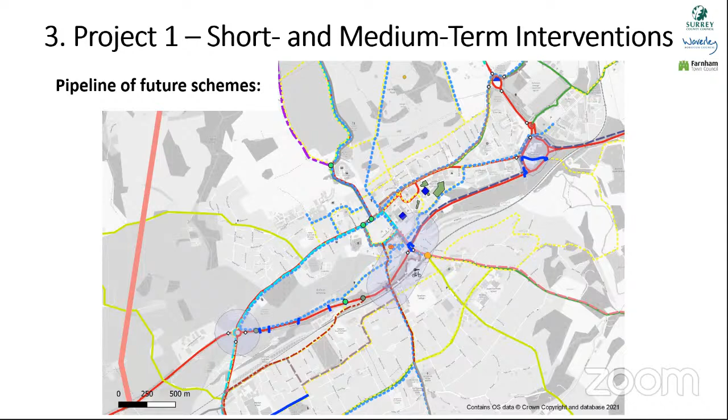Thanks, Peter. So the OIP included some initial routes for walking and cycling, but we're now embarking on the next stage, developing the LCWIP, which I'm not sure everybody knows what that is - a Local Cycling and Walking Infrastructure Plan. That will have a network of cycle routes, and we'll begin to look at the feasibility of those. So it's just basically continuing on from the OIP, looking at the walking and cycling network in more detail.

Okay, thank you. So when do you forecast that the LCWIP for Farnham will be complete? I haven't got that to hand, Peter, but I would suggest in a couple of months. But we can get a more firm answer than that afterwards - in a matter of months.

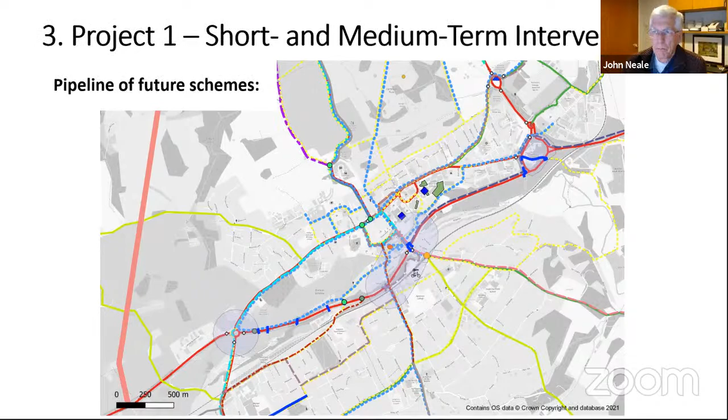That's right. Okay, do you want me to start? So project 2, the town centre project.

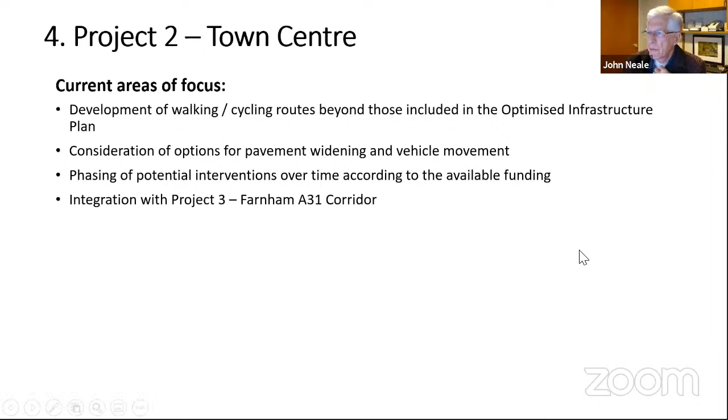Do you want to go to the next slide, or if anyone wants to ask a question at this point, I suggest we go on to that one. Sorry, John, if I can just mention that Pete Goodman still says he's waiting for an answer to a question about wayfinding and so on. There is, if this is the right time to pick that up.

Okay, let's do that. Peter Goodman, I'll read out your question. So if the wayfinding project does not include cycle signage, when will the 2 existing shared cycle paths receive some signage? Tim Oliver has confirmed in writing that this will be included in the short and medium-term interventions.

Elaine, could you just cover that? Yes, thank you. We have been notified of that, and they will hopefully be included in either the LCWIP work or on the medium-term interventions.

Okay, thank you. I know Peter is anxious to see all this put in place, as we all are. So we can only say to Peter, please be patient with us. We're moving as fast as we can. Thank you. Are there any more questions?

Jack Slim asked what happened to the notion of depots for HGVs to drop off goods to be carried to the shops. I think that's something coming up. You can take it as a question now or come back to it. Yes, I'm quite happy to answer it. I'm sure Chris will. This will be something we're looking at as part of the town centre project. Chris, do you want to talk in any more detail about that?

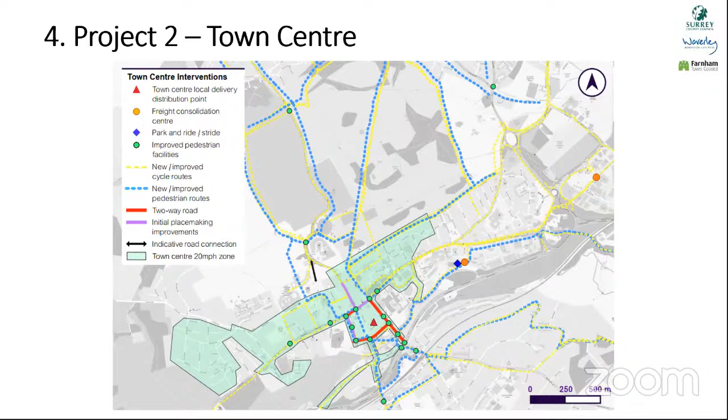Well, I agree, and as we see, this is on screen at the moment. I think this plan's taken from the optimised infrastructure plan report, which indicates the key components of the town centre, which, along with proposals for walking and cycling and placemaking, includes freight consolidation and delivery distribution points. So it's all an integrated solution that would certainly look at freight and deliveries and how we can allow freight and delivery to still happen and support businesses, but hopefully reduce the number of vehicles on the town centre network at the same time.

Thank you, Chris. There's a question or two from Tim Stanley. Tim, would you like to pose your questions? I'm not getting an answer there, so I'm going to read Tim's question: has access to parking been considered for all areas?

Access from the north - I think we've just covered that one, haven't we? Yeah, I think we covered that one, John. Sorry. His second question: pavement widening in the borough has proven to be a disaster for Castle Street traffic. Therefore, can we assume this is not to be a consideration until much later? There's an interesting one for you, Chris.

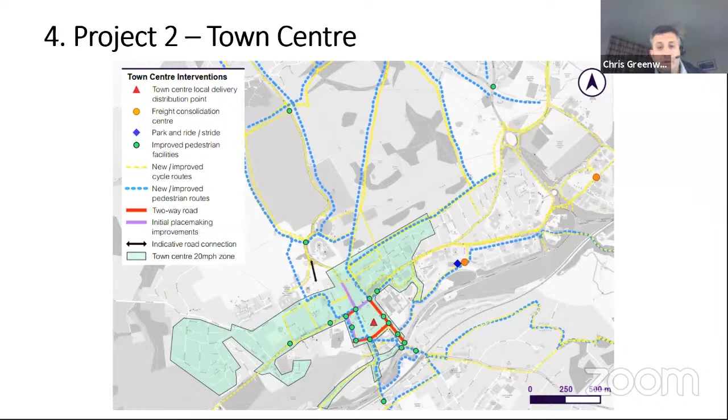Well, when you look at the town centre, you have to look at it as a whole, as well as how each individual street performs. We saw the impact of the social distancing measures that narrowed the borough at the time, and that reduced capacity and led to some queuing at key times. So we take that feedback on board and wrap it into considering how we can bring a plan forward to the town centre that achieves the best balance between the needs of vehicles and the needs of people and the needs of placemaking and celebrating the heritage in the town centre as well. So yeah, the point's acknowledged.

Okay, thank you, Chris. Max Lyons has put his hand up, John, to ask a question. Yes, I was just going to come to - sorry, Max. Max, I have seen it. Max, go ahead. There's a huge desire within the town for some pedestrianisation, and does the OIP actually include any pedestrianisation?

Thank you, Max. Chris: well, I think the OIP plan that was just on the screen indicated placemaking and possible reconfiguration of the traffic system to help us bring that placemaking in. I don't think the OIP has actually ruled in or ruled out pedestrianisation at the moment. It's under consideration, and at risk of repeating myself, these things are always a balance between the extent to which we want to enhance place and create room for people, and the extent to which we need to keep the town centre functioning for everybody, including vehicles. So I don't think it's been ruled in or ruled out at the moment. It's part of considering the options for the town centre.

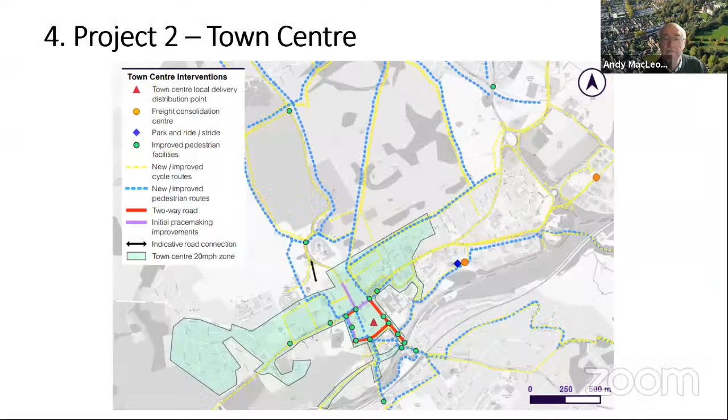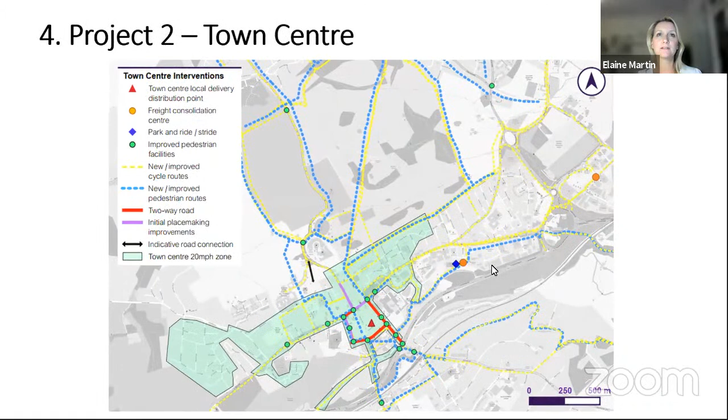Right, let's carry on. We're on to slide number 16, I think. Project 3. So if you can just move the slide for me. Next one. Here we go.

Lovely, thank you. So this is a geographical layout of the Farnham A31 corridor.

Since you last met with the team, we have been to the Department for Transport and discussed Hickley's Corner Junction, which I think was the last time we spoke. And it's now been extended to Coxbridge, from the Shepherd and Flock roundabout through Hickley's Corner to the Coxbridge roundabout. So it's a corridor-wide scheme now.

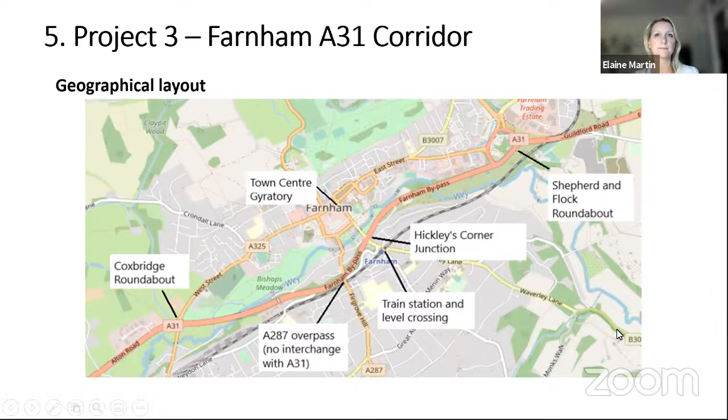And if we go on to the second slide, please. So the objective of the project is to ease congestion and delays on the A31 at the key junctions, improve road safety, improve the transport network prioritising public transport, improve walking and cycling at the Hickley's Corner junction and the connections to and from Farnham town centre, to resolve community severance by improving connectivity across Farnham, and reduce the impacts of the level crossing. It's hoped to facilitate development in Farnham and improve sub-regional movement along the A31 corridor, and also address, as part of the OBC, air quality issues in Farnham.

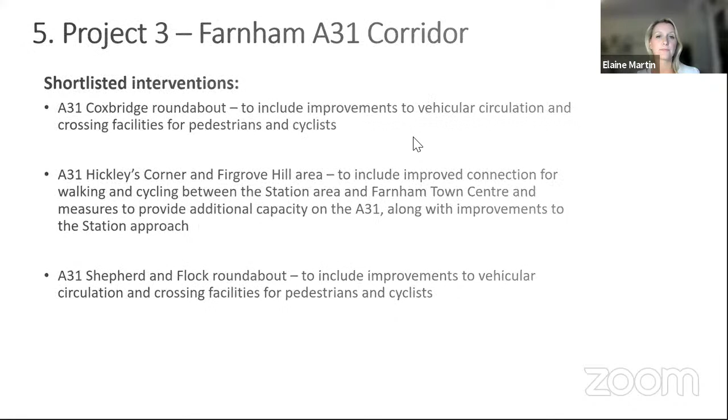So if we go back to the previous slide, please.

The current options we're developing are the A31 Coxbridge roundabout, which will include improvements to vehicular circulation and crossing facilities for pedestrians and cyclists. The A31 Hickley's Corner and Firgrove Hill area will include improved connections for walking and cycling between the station area and Farnham town centre, measures to provide additional capacity on the A31, and improvements to the station approach. The A31 Shepherd and Flock roundabout will include improvements to vehicular circulation and crossing facilities for pedestrians and cyclists.

So these will be the shortlisted interventions which will be presented to the Department for Transport. And essentially, if we go on to the next slide, we will pass this through our partners, which is Waverley Borough Council and Farnham Town Council, to check that they're happy with the submission. It's essentially a line in the sand to say we'll be bidding.

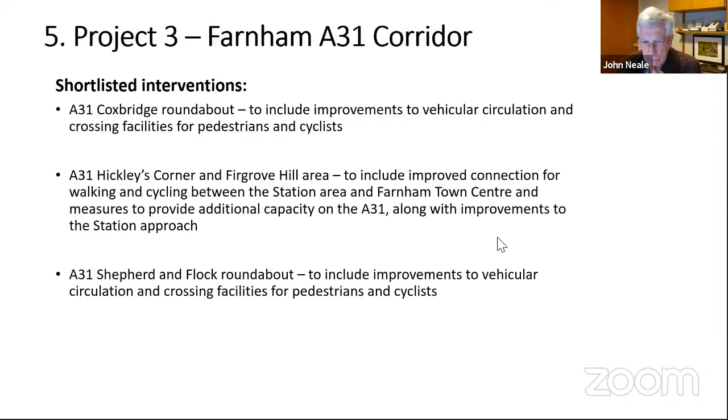Sorry, I didn't hear that bit. Proposing developments — if you look at one of your slides, it says facilitate development in Farnham. Could you just explain that comment? It's the one before that, or the one after it.

Well, it's not just Farnham, it's all over, to make sure that we're allowing for additional capacity on the network. It's not that it will allow anything to come forward and it can take the capacity. Chris can fill us in on that bit, because his team have been modelling this. So Chris — does the word development imply house building or other building, or does it mean some other form of development?

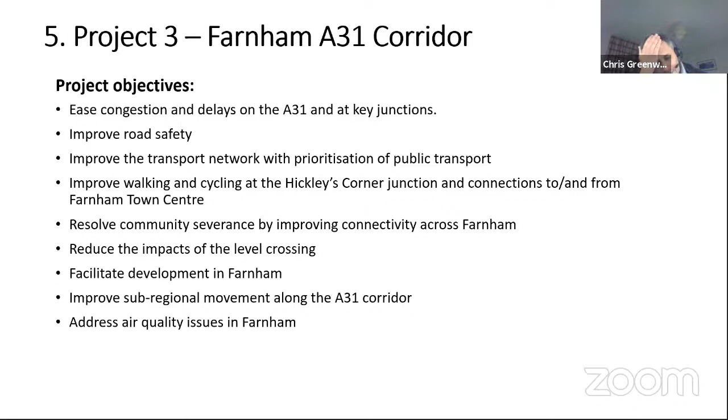This objective on the screen is about facilitating development in the wider area and growth across the region, not just in Farnham. Okay, thank you.

Right, do we have any questions here? There's a question from Peter Goodman: will any improvements for cyclists at Hickley's Corner be completed before Project 3? Without this, South Farnham will remain cut off from the rest of Farnham for cyclists.

So this will be considered as part of the LCWIP, the Local Cycling and Walking Infrastructure Plan. Chris, I'm sure you can confirm that will be looked at, hopefully to coincide at the right time. The early work we did on the OIP, the Optimised Infrastructure Plan, looking at walking and cycling routes, has identified that the connection between South Farnham, the station, the town centre and the rest of Farnham on the other side of the A31 is key.

So that's identified as a key route anyway. Project 3 looks to integrate improvements for that route, as Elaine has said. The further work we're now going to do on the LCWIP will look at that route again, to see whether there are any short-term improvements that can be brought forward before Project 3. I do think, though, that dealing with Hickley's Corner is a big project and really needs an integrated look. But the LCWIP will pick it up and consider whether there's anything that can be done before the Farnham A31 corridor project, particularly as Elaine has said, that's bidding for funding.